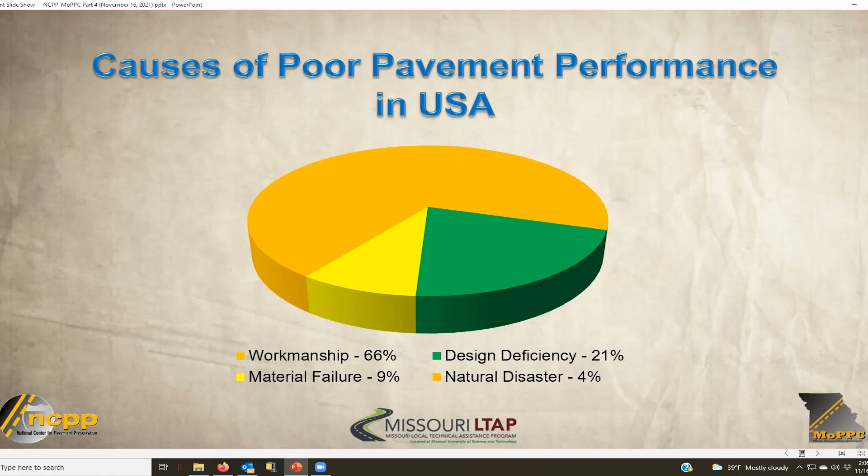But workmanship is the key. We're going to go through and show you a couple examples, because we can talk about this all day long, but if we're not getting good workmanship out on the job, we're going to have a problem. This is an example of poor chip seals - unacceptable.

You can see that probably the aggregate was dirty. Maybe they didn't sweep it properly. Maybe the emulsion began to break before they actually got the stone embedded. Maybe they didn't roll it properly, but these are all problems.

This is what a chip seal should look like. And I want you to think about this for a moment. A chip seal is made out of oil and rock. My gosh, isn't that what hot mix is made out of? And if you can't make a chip seal look like a hot mix, you're doing something wrong.

We owe it to the public to give them a road that doesn't have loose stone, that looks good, and it's going to last a long time. And if we're doing a chip seal properly, this is what we get.

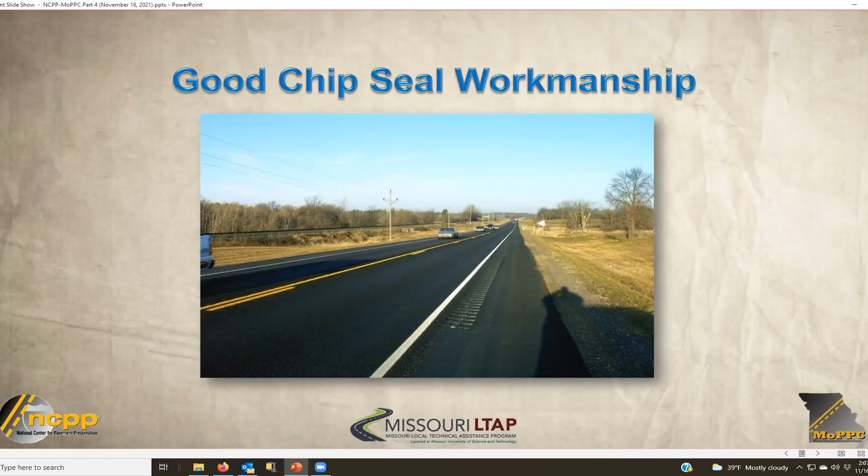Let's move into workmanship that's unacceptable with microsurfacing. You can see the chatter, or the little chatter bumps in it. You can see a joint. It's not a good microsurfacing, and this really is unacceptable.

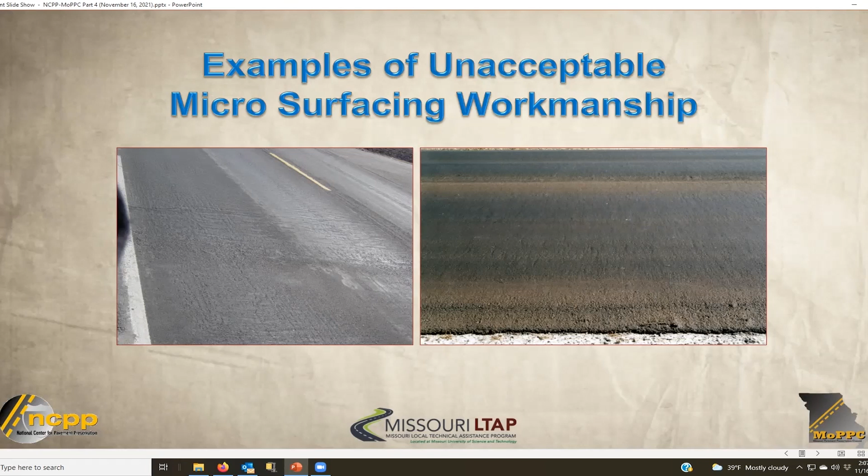Microsurfacing, we can put it down and open it up to traffic within an hour's time in most cases. And a microsurface will wear for years. So it's a very, very good product, but it's unacceptable if the workmanship isn't there.

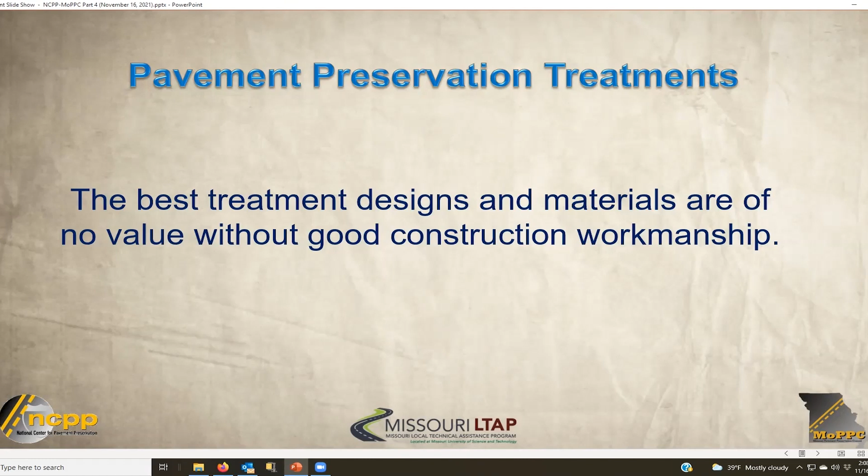The point I'm trying to make here is the best treatment designs and materials are of no value without good construction workmanship. And what's the key to construction workmanship? It's a quality assurance program.

Chris and I can talk about this for a long time, but quality assurance is not only quality control from the contractor, it's quality acceptance by you, the agency person, and then it should have some sort of independent assurance along with it to make sure the tests are done right and things are calibrated properly. So this is one of the keys.

And if we have a good quality assurance program, we're not going to have a problem. Both the agency and the contractor take responsibility for the project. So quality assurance is the key.

Now let me jump ahead into one other portion. This is talking about specifications, and this is where your input is important. We have a polling question - Christy, if you could put that up.

And the polling question is, where would you likely find a good pavement preservation treatment specification? Give us just one single choice.

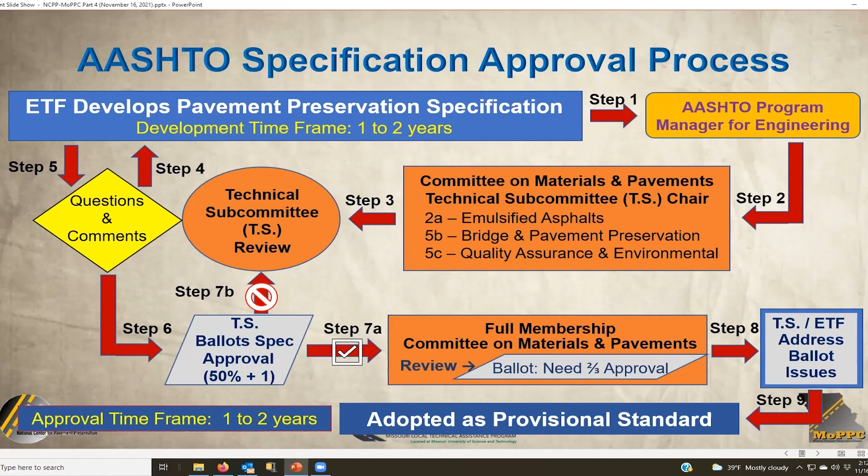And that's why I like AASHTO specs, and that's why I want to talk about them, because they are really important. They have their own referencing system.

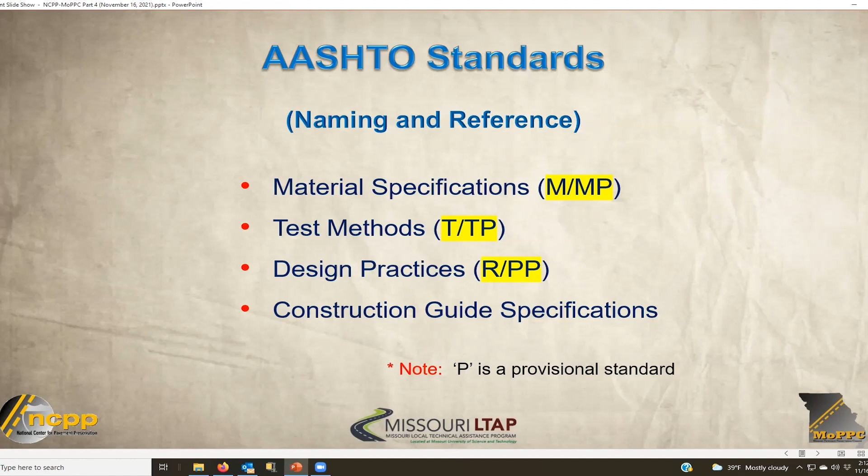If you want to get a spec from AASHTO, you'll have to pay for it - they're in the neighborhood of about $35, some a little more, some a little less. But they have various codes. The P at the end of each one means a provisional standard, and provisional standards are there for a while until they become a full standard. They become a full standard when people begin to really use them. So that's just a little bit for your information.

Now I'd like to have you write this address down, because I'm going to give you a way you can get an AASHTO spec at no cost. So http://TSP2-ETF.org. I'll give you just a second to write that down. And that's going to take you to a web page.

First thing you'll come across are all the checklists - these are just the asphalt emulsion treatment checklists. The National Center wrote these back in 2019 for Federal Highway, and Federal Highway has since published them all. If you're out on a job and you don't know exactly what to look for, these will tell you - it's a step-by-step of how you build a job, not as a contractor, but as an agency person, how you build and inspect the job. So these are good resources for you.

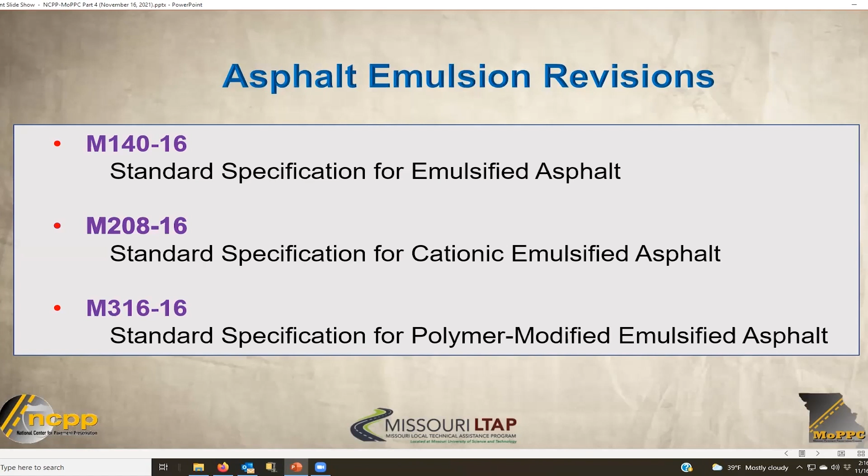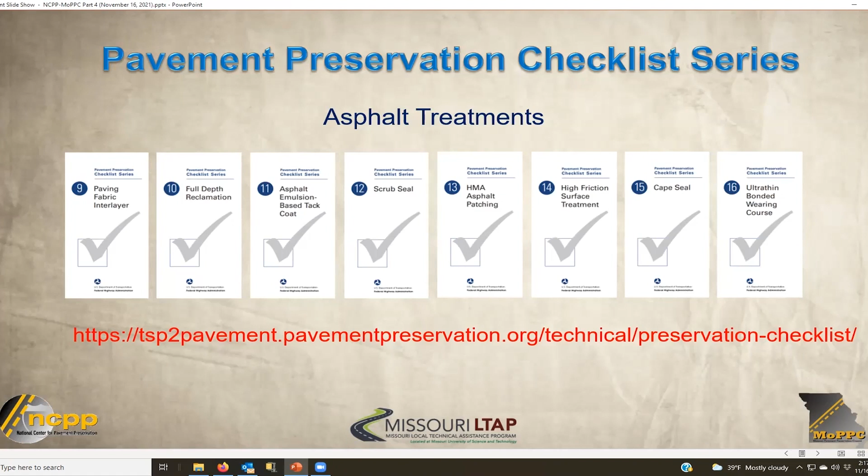If you want to get into more treatments, Federal Highway has the checklists on their website too. So it's the technical preservation checklists, and they have them for concrete as well. So that's a real quick run through.

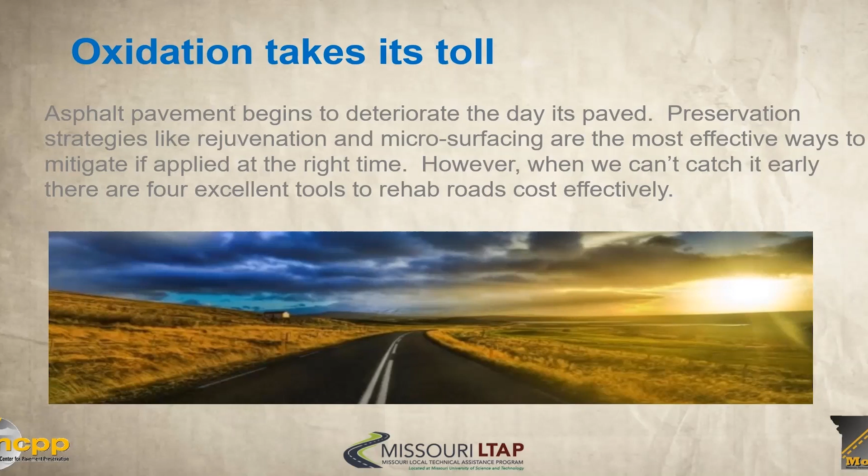However, when we can't catch it early, these next 4 tools are great to rehab roads cost effectively and in essence put us back on an equal footing when we've lost the initiative by not doing enough on the top of the curve. So without further ado, for those of you who may recall, we had the first of these costs kind of 1 through 6.

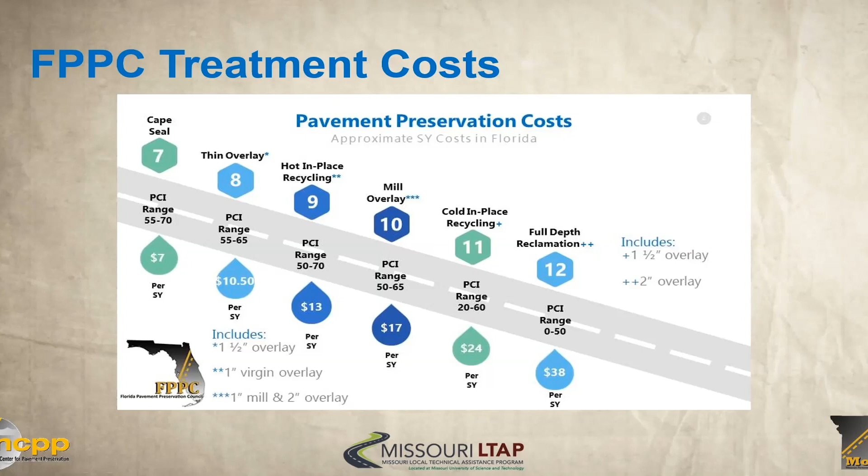Okay, so which type of process are you most familiar with? Let's start that, see what we got. All right, I'll give you a few more seconds.

I'm rooting for somebody to hit cold in place recycling. Poor cold folks are in the cold. Okay, I'm going to shut it off now.

We'll keep on moving. Okay, so as we can see, we've got pretty equal full depth reclamation, which is actually, again, not really a preservation technique, but it wins with 41%. And then we got tied for 29% at warm mix and hot in place recycling. So cold in place, everyone on this call is going to get more familiar with cold in place. So pretty exciting. All right, let's get back to it.

Starting with asphalt overlays, there's a couple different strategies. We're going to cover real quick some thin overlays, kind of an intro, and then talk about bonded wearing course briefly and warm mix asphalt.

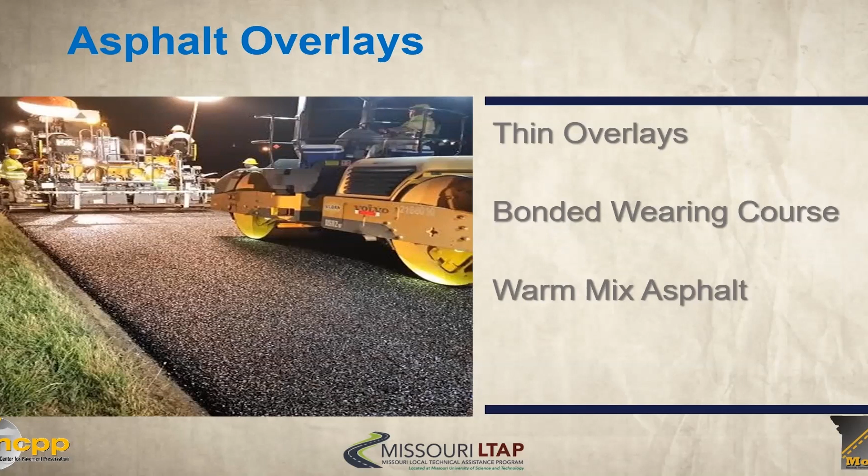Thin overlays are really that traditional overlay process. It can be with or without milling, and the thicknesses range, as far as what we'd consider strictly preservation style overlay, anywhere from that 4.75 millimeter, sometimes more of the Superpave 9.5 or 12.5. But these are really designed for use on pavements that are in good condition or structurally sound base-wise.

There's some different types - obviously conventional dense graded, and then you've got open graded friction course and stone matrix asphalt, SMAs. In addition, we have something called the ultra thin bonded wearing course.

If you're familiar with the EDC - I think it's 6, they all run together - if you're familiar with that, this is actually on the current Every Day Counts initiative, and it is listed as one of those techniques.

This is an old picture from back in the early 2000s on a project I was on, and it used to be called NovaChip back in the day. In this picture it is.

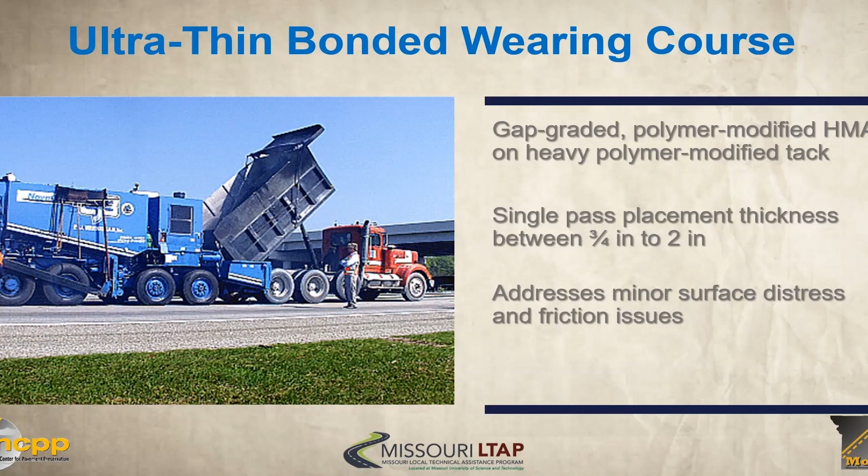It really uses a gap graded polymer modified HMA on this polymer modified tack coat. It's a single pass treatment, and the thickness really ranges from 3/4 inch to 2 inches. It's really intended to address some of the surface distress and friction issues, in addition to some light raveling, those types of things.

This is what happens if you step in it - it's highly polymer modified, the tack coat is. Definitely don't want to stick to the road.

This is a picture I took back in 2001, and you can see this material kind of wicking over a concrete pavement. I would kind of equate it to the rubber band effect - it's an SB, styrene butadiene block copolymer.

It sprays very easily, cures quickly because the hot asphalt is placed over the top of the emulsion, and obviously has a lot of superior bonding qualities to that as well. And then you can read the rest.

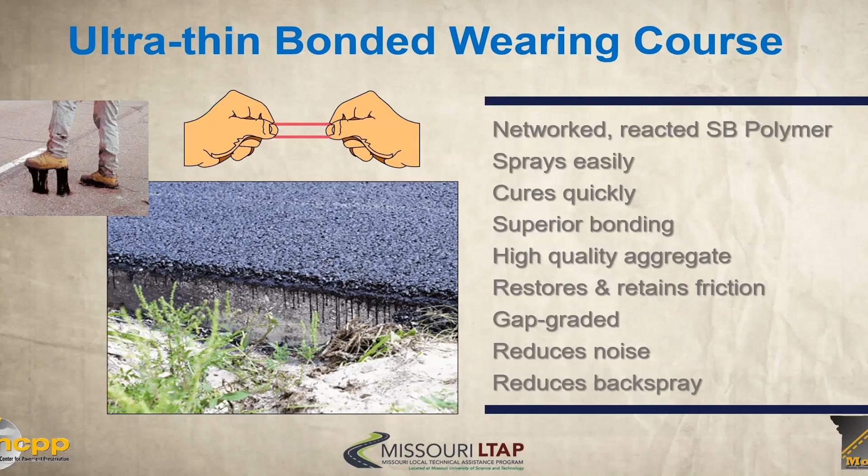We've got reductions in noise and back spray because it is gap graded. It's great on friction. And this is what it looks like when you're looking down at the spray bar in the back of the paver.

So here's where the asphalt is being placed onto the mat, and then you have the screed back here. But right in front of that is a spray bar, which is variable width, and it's spray applying this polymer modified tack coat.

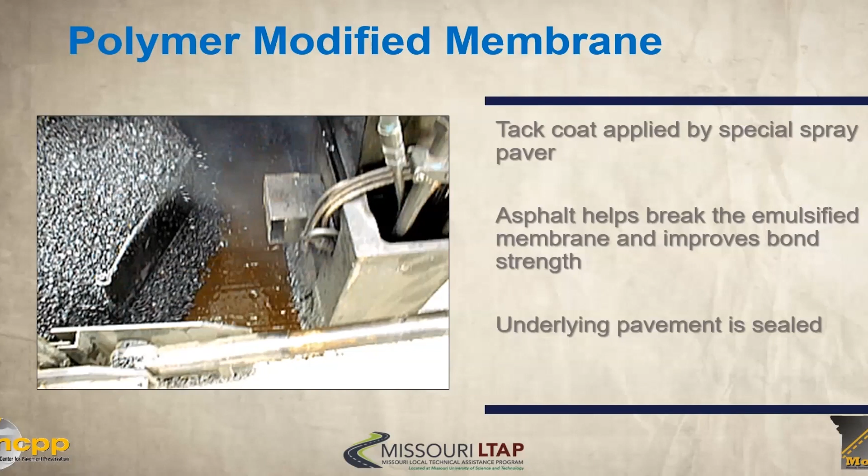So in essence, that's where the preservation comes in - it's sealing the existing pavement. This would be akin almost to a rubber membrane interlayer, for instance. And this hot asphalt helps break the emulsion very quickly, and it improves the bond strength.

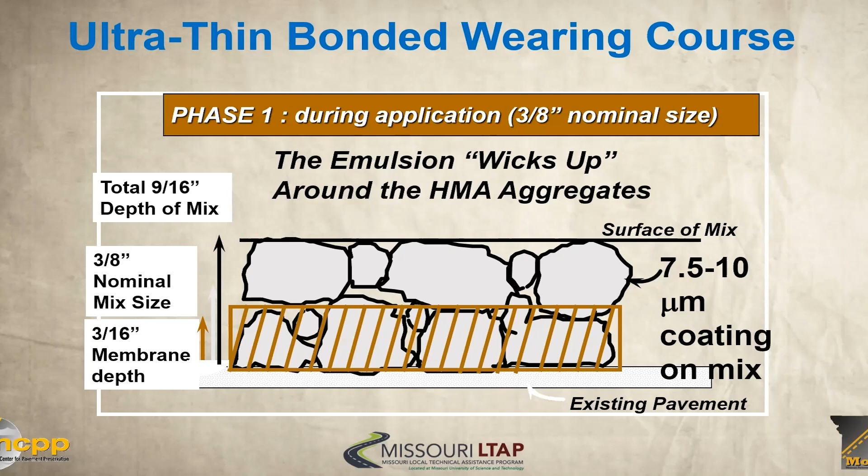Because you have greater micron coating on the mix, on the aggregate, it's going to extend the life of the asphalt overlay. And here you have it again - you can see now, it should be black, but this little section here is now cured and adhering to the existing pavement.

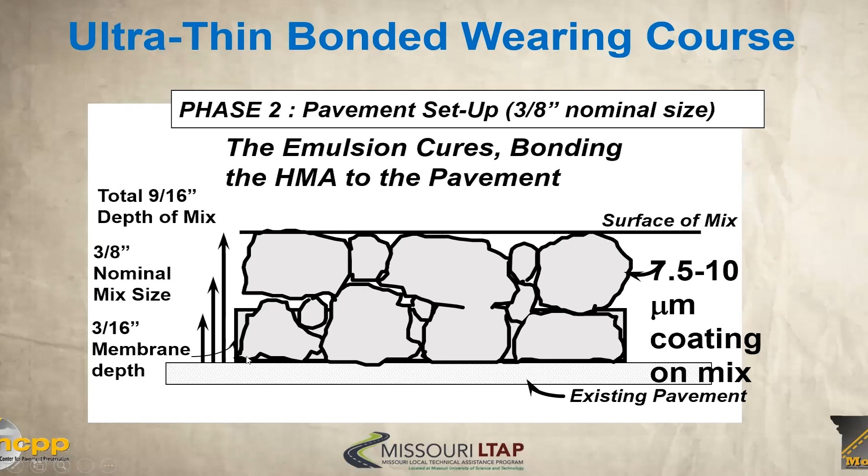It's very quick, and for something that's normally not done - meaning we don't usually do very thin overlays on top of concrete because of the fear of delamination - this is very effective. We completed the project, or the test section, in less than a couple hours.

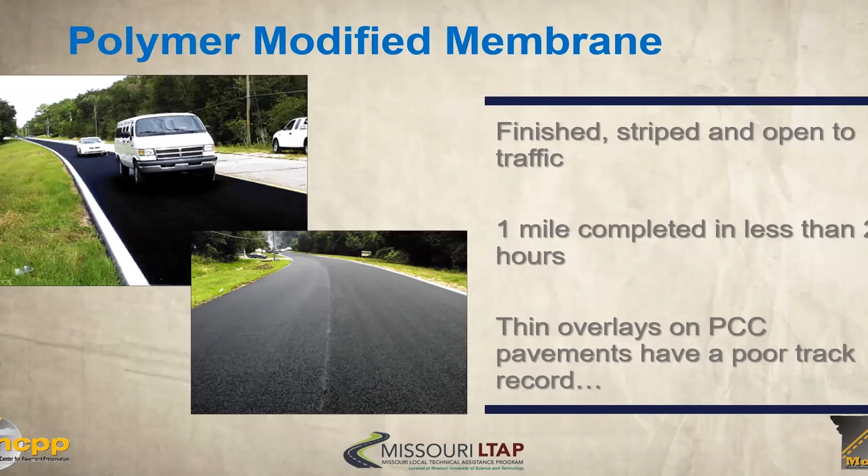Typically you would have a lot of cracking come back through this at less than 1 inch. But you can see here through the ages where I've been able to follow this same joint, just how effective it's been.

I actually was out there - I didn't get a picture of it, but I was out there in 2020, and it still looks very good.

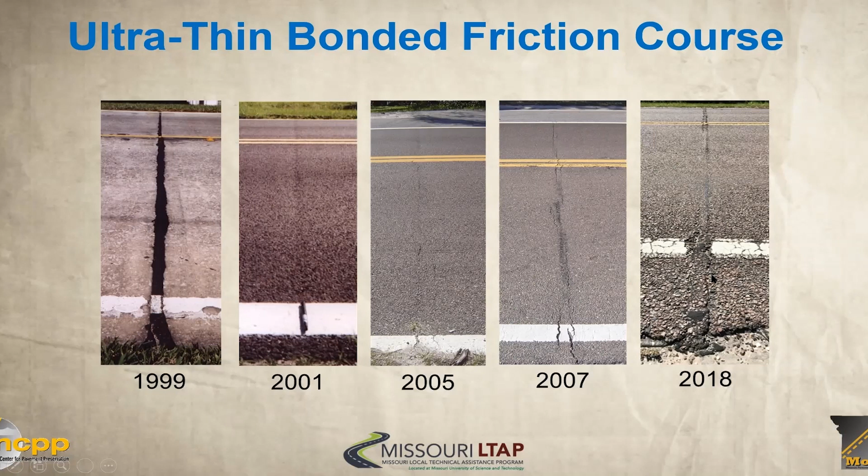It looks about like this. So we're going on over 23 years now.

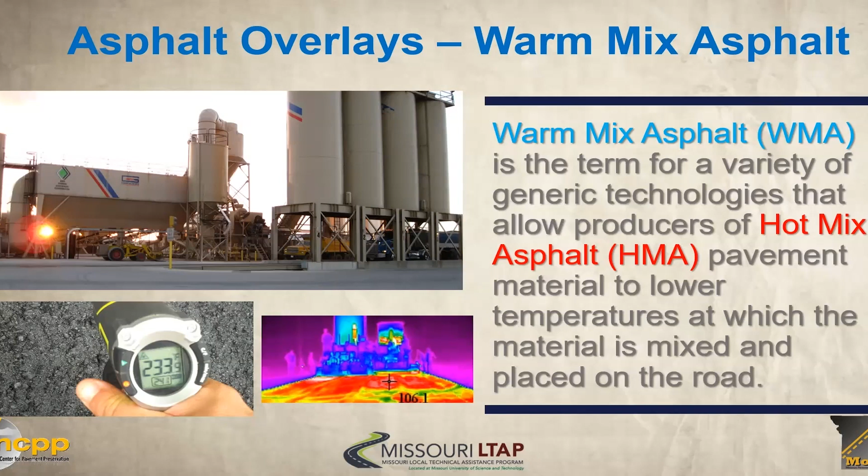Moving over to warm mix asphalt, that's really the term, and you probably are hearing more and more of this, especially as we get into what you're seeing with the emphasis on green technologies. Warm mix definitely qualifies, and this is a generic technology that allows asphalt producers to produce the mix at lower temperatures, and there's some benefits to that. I won't spend a ton of time.

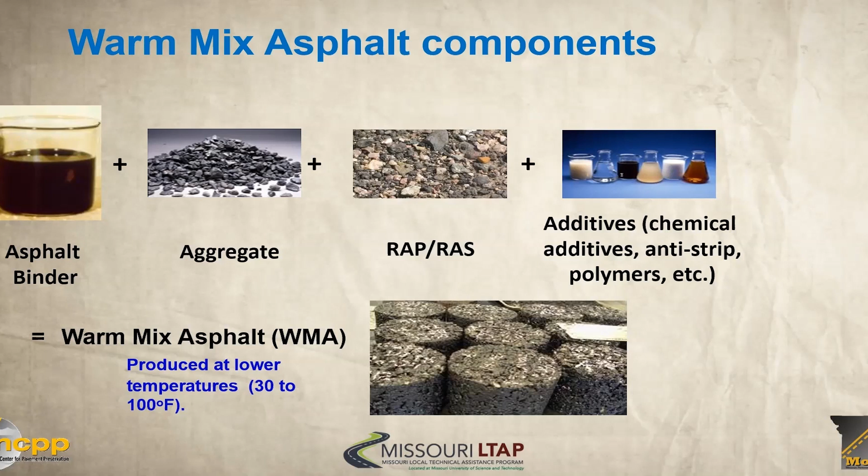There's multiple different types of additives or technologies, and they each have some different requirements. Foamed asphalt requires special equipment at the plant. But if you look at the components, you have the asphalt binder and aggregate, and then you could have RAP or RAS, and then the additives, if it's a chemical additive or anti-strip, polymers, those types of things. You add all those things together and you get warm mix asphalt, which is typically produced at much lower temperatures, meaning less greenhouse gas emissions, less fuel burned at the asphalt plant.

So if you look at the advantages, this is a great picture, and I've seen this myself in person, how much less emissions and smoke and issues resulting from warm mix versus hot mix. You can just see that right there at the project.

And because of that, we're able to replace some of the things that go into standard hot mix, like lime or liquid anti-strip, because some of this chemistry is actually also a liquid anti-strip.

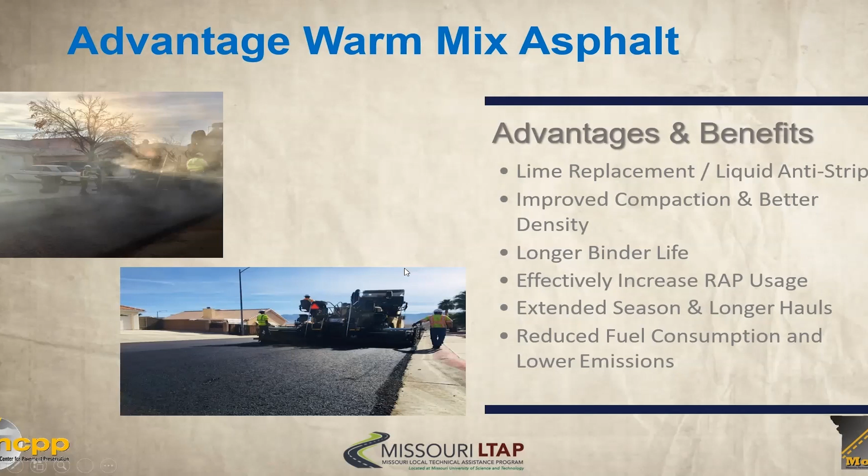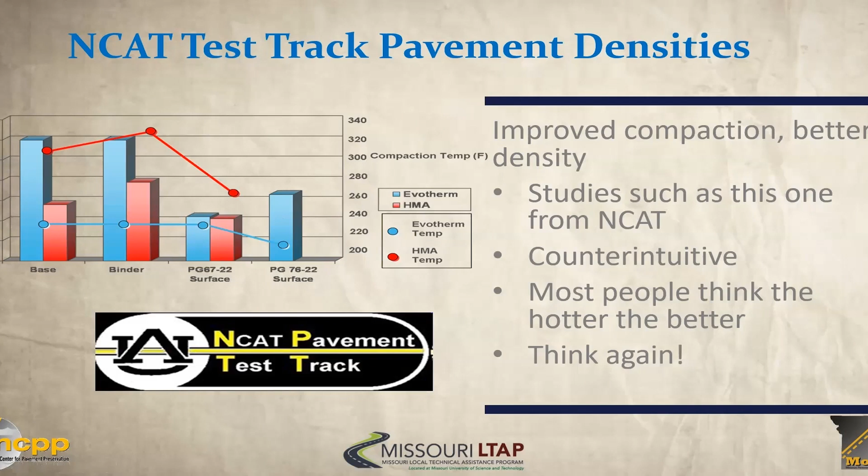Same thing across here. And you can see for PG 76-22, we didn't even use a hot mix technology in this instance, it just went straight to warm mix. So it's counterintuitive - most people think the hotter the better, but we need to change that mindset and really look elsewhere.

So just as we talked about in Module 3, the maltenes or the light ends - those are the three components that make up the maltenes versus the asphaltenes in the asphalt binder. This is also helping us with warm mix because less of these maltene fractions oxidize, volatilize, and leave the asphalt under the hotter or cooler conditions.

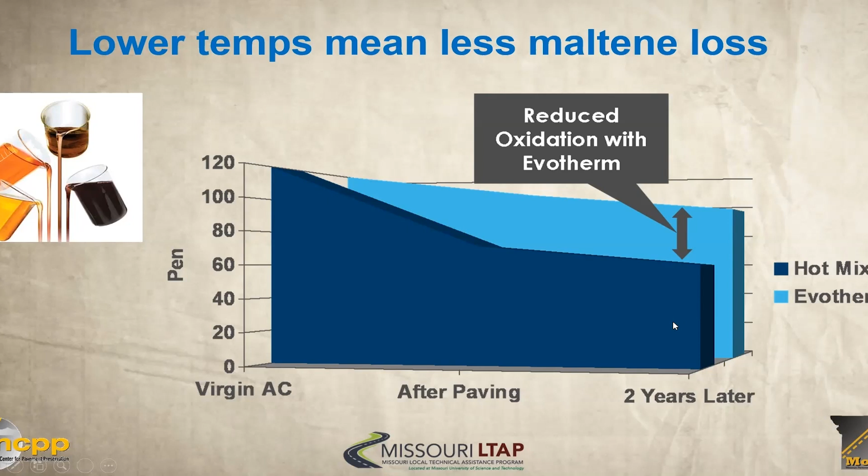So in this instance, again with NCAT, you saw this reduced oxidation with the warm mix technology here. And that equates to a longer binder life after 2 years, so increased RAP usage obviously can save money.

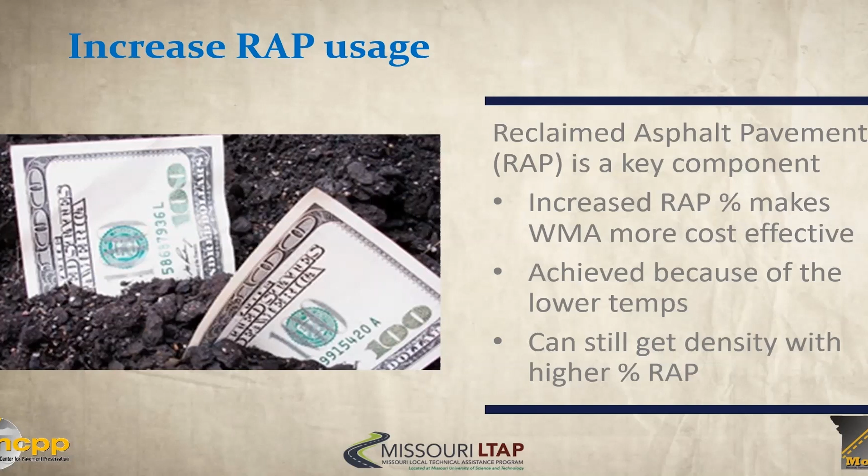We won't spend a ton of time on this, but increased RAP obviously makes the warm mix more cost effective. And we can achieve these savings and include more RAP because of the lower temperatures and still being able to get good quality density of this mix with higher RAP percentages.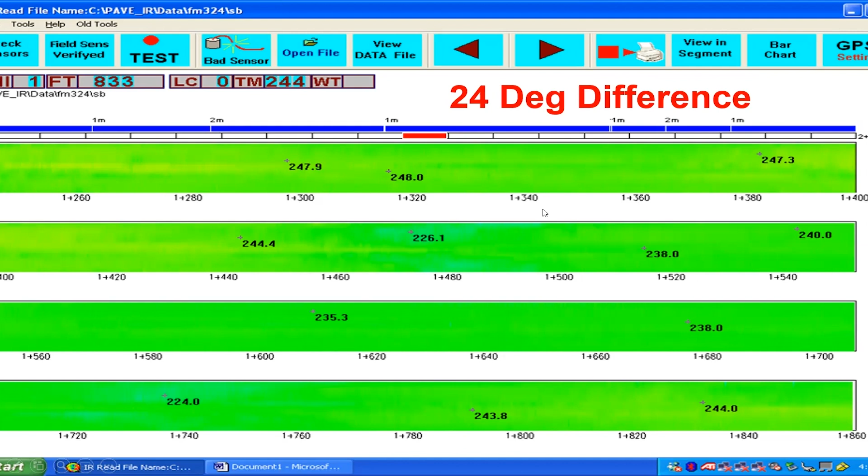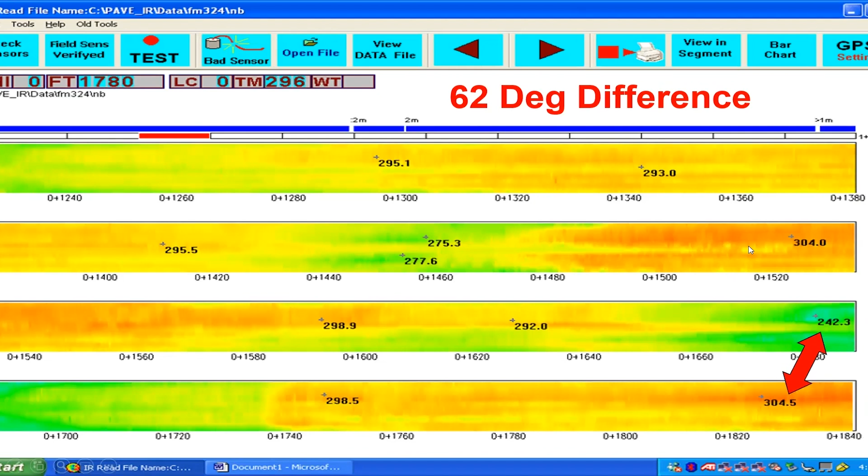Whereas with warm mix, because of the thermodynamics of the material and the fact that the cooler it is, the less rapidly it continues to cool, we have a much lower delta between the beginning of the load and the end of the load. And there's a definite advantage to that. So typically you can see load segregation, thermal segregation, meaning this part of the pavement wears out at a different rate than this part of the pavement, and that's decreased.

The other thing is that the hotter you have the aggregate, the more absorptive it can become. So asphalt contractors have figured this out, and they can actually reduce by maybe a few tenths of a percentage the amount of asphalt binder required to achieve the same results. So you can see in this core, we have hot mix and then warm mix, which is really fascinating.

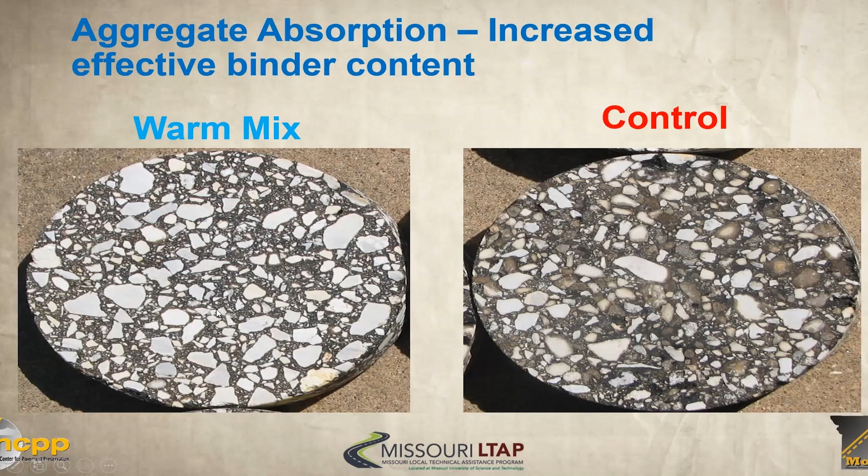Obviously much greener - if you looked at a tunnel with hot mix, it'd be full of smoke. So stack emissions test - I've talked to asphalt contractors here in Florida where when they're running a stack test for pollutants, they run warm mix. So they make sure they run it because they get much better results.

So let's do poll question number 3 here, and then we'll hop into the next segment. Which advantage of warm mix asphalt is most valuable to you? For those of you who are using it or have used it, let's go ahead and see what you chose as the highest value.

I'm interested since this is Missouri, so we'll see what everybody comes up with. All right, we'll do about 10 more seconds. All right, let me wrap this up and share the results.

So as you can see, it's kind of a mixed bag. We have longer binder life, which I'm excited to see. And then we have improved compaction, better density. In some ways that also can be shared with that extended season, longer hauls, because you're getting these better densities in longer hauls, and actually giving yourself the ability to go a little bit later into the season, which I imagine everybody's trying to do. And then finally, lower emissions.

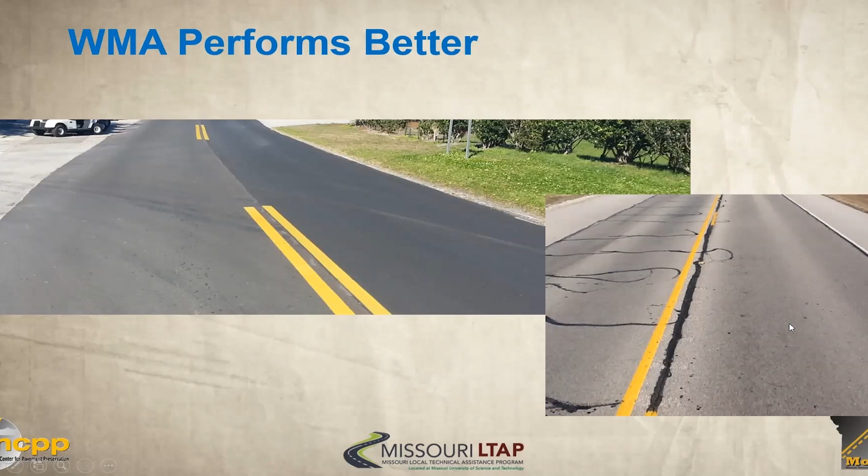So if you look at this side, this is the warm mix side versus the hot mix side.

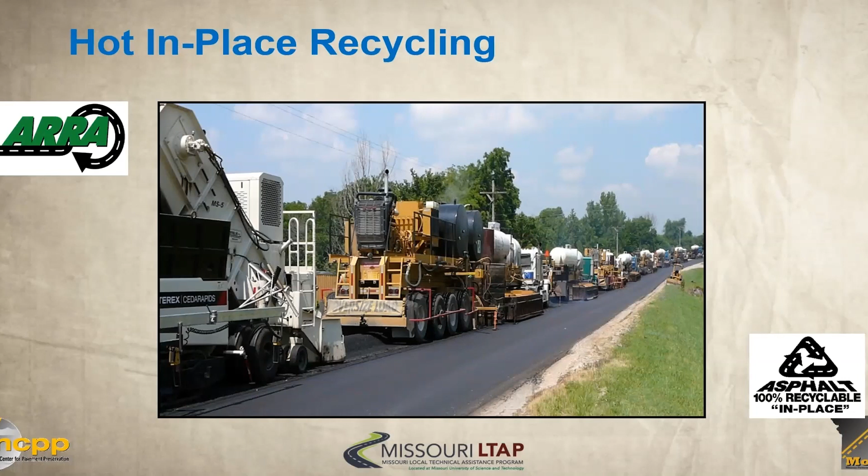In the end, okay, we'll dive right into hot in place recycling, try to keep this train moving, pun intended. This is a serious train right here. These are preheaters, you can see just how many they have stretched along here. And this is a process that is really fun to see if you haven't seen it take place.

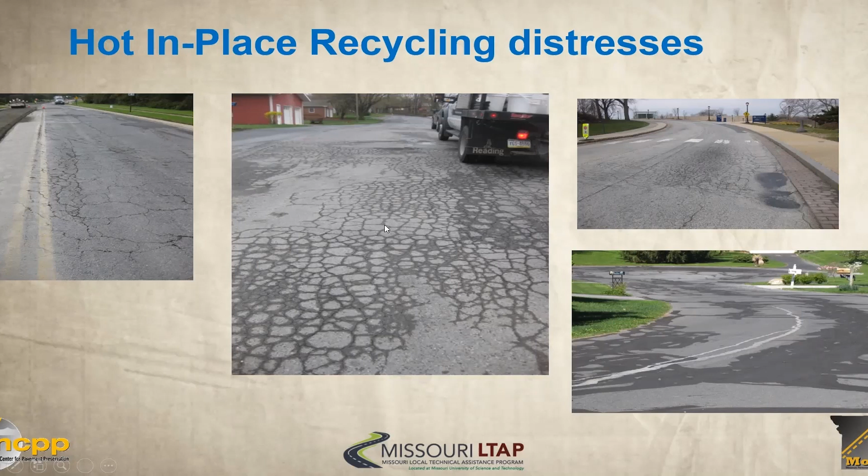So what kinds of distresses can hot in place address? Well, here's a few slides, and it's important to make a distinction of what's causing these cracks. Coring is recommended in any of these in-place recycling techniques. We want to make sure this isn't base related, that this is more of a surface asphalt situation.

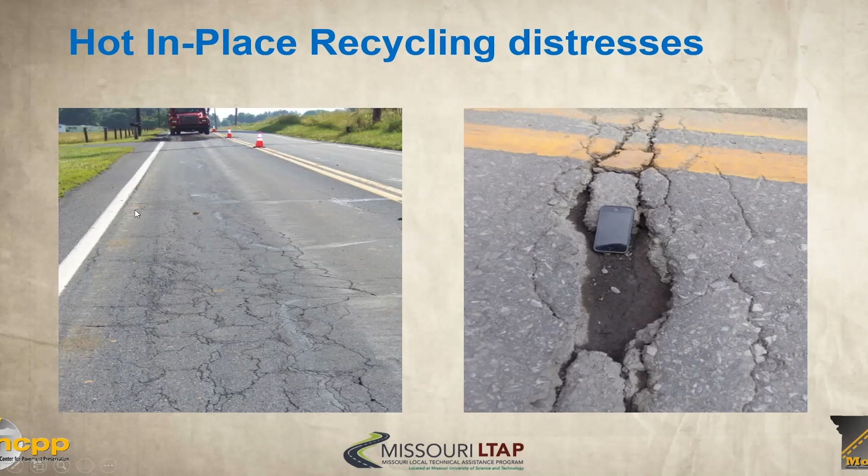So let's do another poll question, number 4, we're keeping you guys on your toes. All right, what type of pavement distresses can hot in place recycling address? This is a little pre-screening to see how familiar you are with the types of distresses that can be addressed. We'll see there might be something to trip you up a little bit here, and we'll see what you come up with.

When in doubt, everybody always goes for all of the above. Let's see what happens here. Give you a few more seconds. Okay, I'm going to share the results.

So it looks like most folks think all of the above. And while that might be appealing, there's one thing we have to watch out for. There should be a little asterisk here, fatigue cracking. Some of the pictures that I showed kind of looked like a fatigue cracking issue. We have to make sure when we're using hot in place that the base is not the cause of those alligator crack patterns in the pavement.

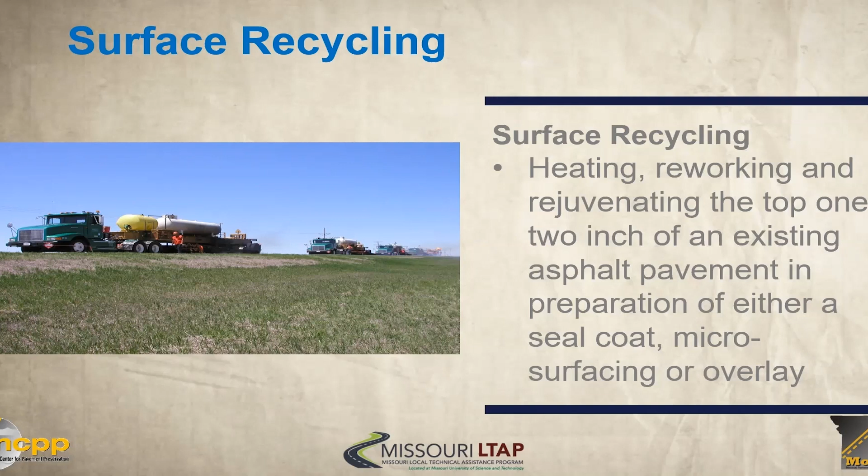And it also depends, with that poll question, on which type of hot in place recycling technique or strategy you're using. With surface recycling, you can see here, we're really focusing on heating, reworking, and rejuvenating that top 1 to 2 inches of an existing pavement. We might be doing that in preparation of something else, or it could be that we're leaving it as such as the riding surface, depending on traffic levels.

So for that process, just a brief introduction: you want to heat the pavement to about 275 degrees, and then basically you're going to try to scarify the heated material to a depth of about 1 inch. Then that scarified material is compacted, and the recycled lift is overlaid. So if you look at it here, we're compacting this recycled material for the surface recycling.

Now, one thing to note is this is typically, because we're penetrating down about 1 inch, this is typically why we put some sort of other surface treatment on top, because in essence this is recycled material, and it might be good if you look at the longevity of the pavement to really look at another overlay or maybe a micro slurry chip seal over the top.

And this would be an area that we use for more of a rural condition. You can see from these two slides, very rural environment here. Could be in my home state of Kansas for that matter.

So talking about remixing, this is really getting to be—these next two more frequently used than just surface recycling around the country. This is where we're heating, reworking, and rejuvenating the top one to two inches and adding virgin aggregate, mixing that virgin mix in with the newly recycled material in a pug mill, and then laying that, either as a binder or a surface course. So this is a common type of approach and one that we see.

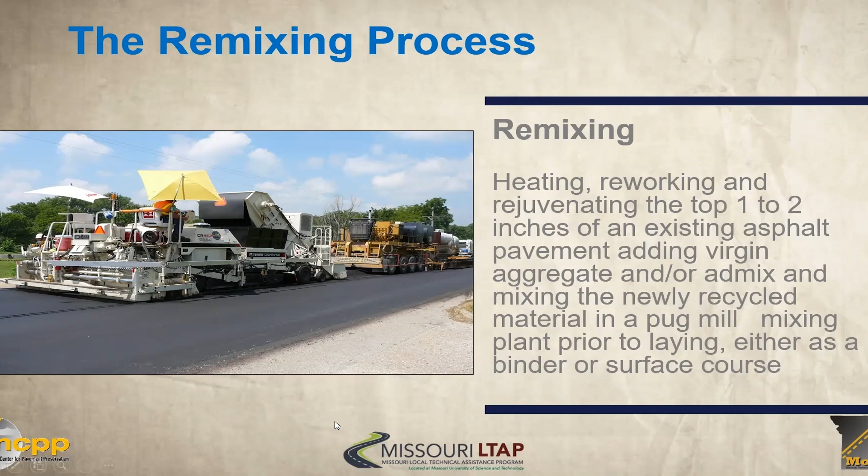Now, it does share kind of similarities to the next process that we have. I'm going to show a little film from Sedgwick County over in Kansas, my home county, if you will. I was able to find this, so let me cue this up and see if this works.

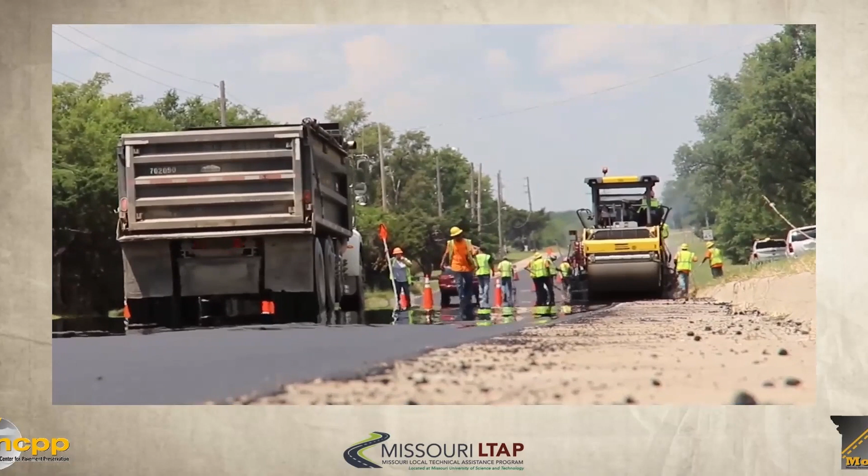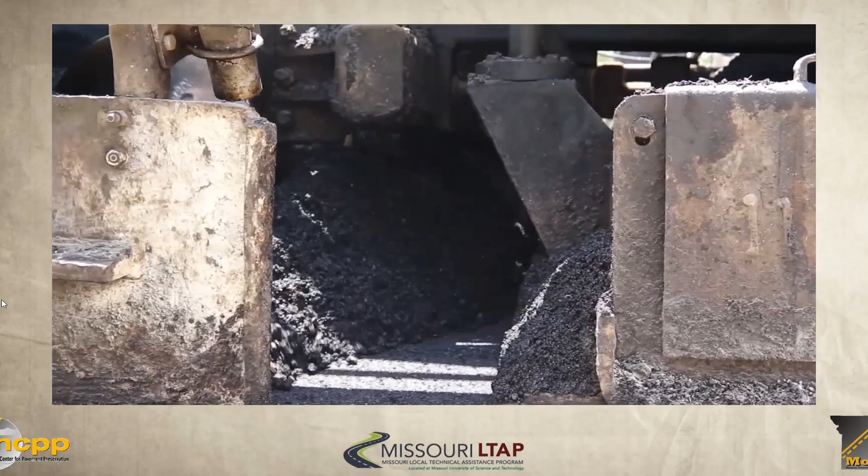There's no sound, Chris. Oh, there's no sound? Okay, this happens sometimes. That's okay. So I don't know why I can hear it.

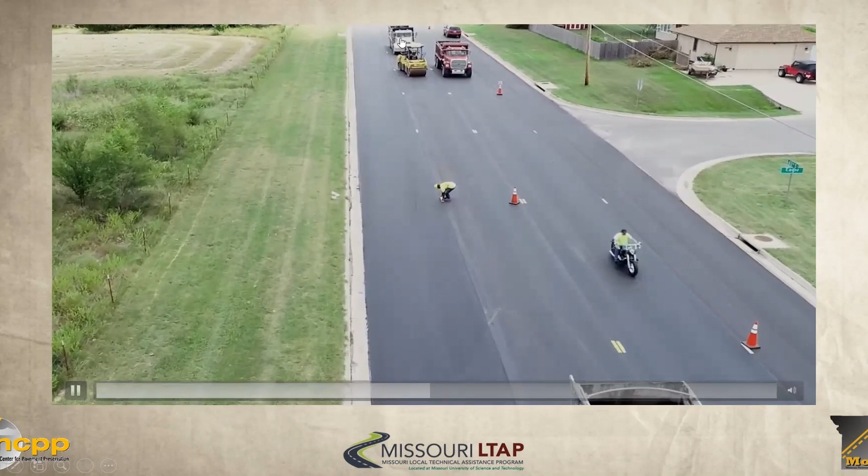Thank you, Larry. And so what you can see here is that they're basically using a process, a hot in place recycling that's going to remove the distressed, old oxidized pavement, and then hot in place recycle that. This specific strategy is repaving.

Continuous process with the self-contained train. This is what's happening: you're heating the surface, you've got heated pavement milled, and then we're able to inject emulsion per the mix design, mix and use a windrow, and place the recycled material by the paver and then compact that.

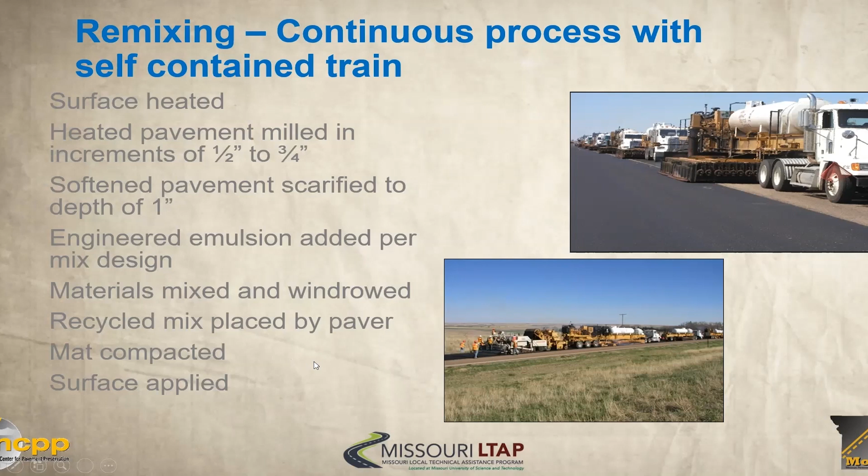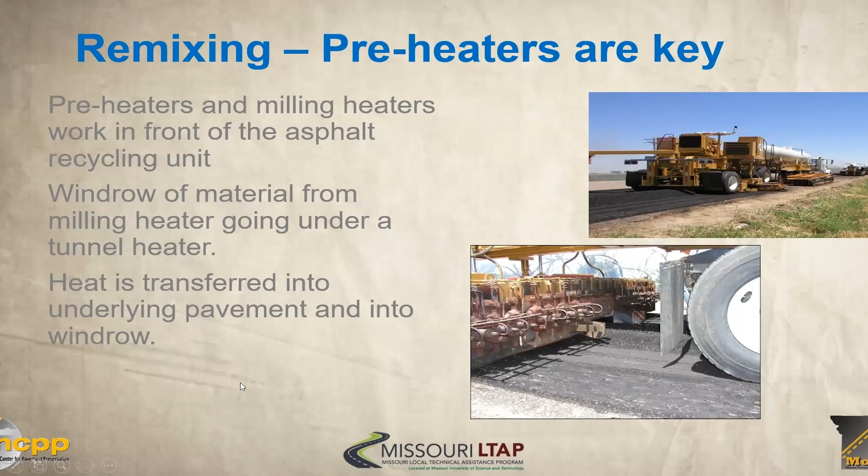So as with any of these, the preheaters are key. That's why you saw that slide where it showed just a handful of preheaters in front. Here's the windrow you can see. You windrow this material from under the tunnel heater, and the heat is transferred into the underlying pavement and into the windrow. This is a very effective way to do it.

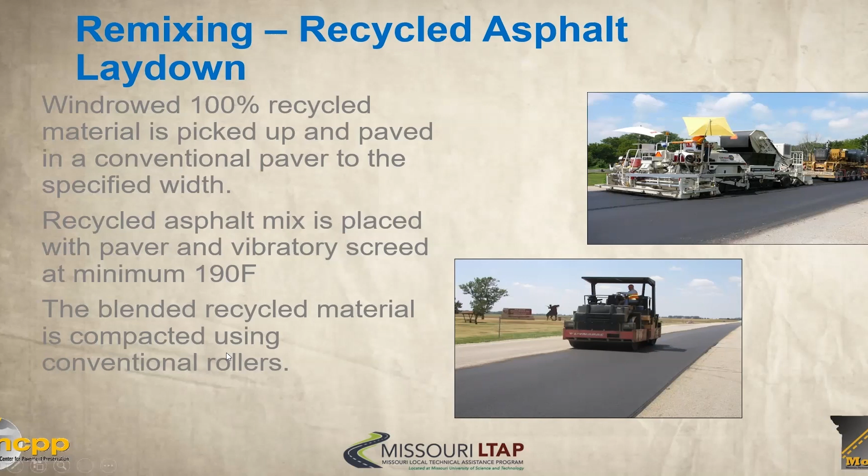And the nice thing is that windrowed material, one hundred percent of it is recycled material, and it's picked up and paved with that conventional paver. Then the recycled asphalt is placed with the paver, and you've got now a blended recycled material that's compacted with conventional rollers.

So this final strategy is called repaving, and repaving is different from remixing in that we're heating, reworking, and rejuvenating the top one inch of an existing pavement, and simultaneously, as you can see from this, we have two screeds simultaneously placing the virgin mix over the recycled mix. So here is the recycled material, here is the virgin material. And so that's the distinction.

And it has some distinct differences as well. In this instance, this preheater is using hot air instead of traditional burners, and the train is scarifying, adding a rejuvenating agent, and then laying the recycled material. And like you saw, the train actually has two screeds. So the final lift is always new—in this repaving process, it's always new asphalt.

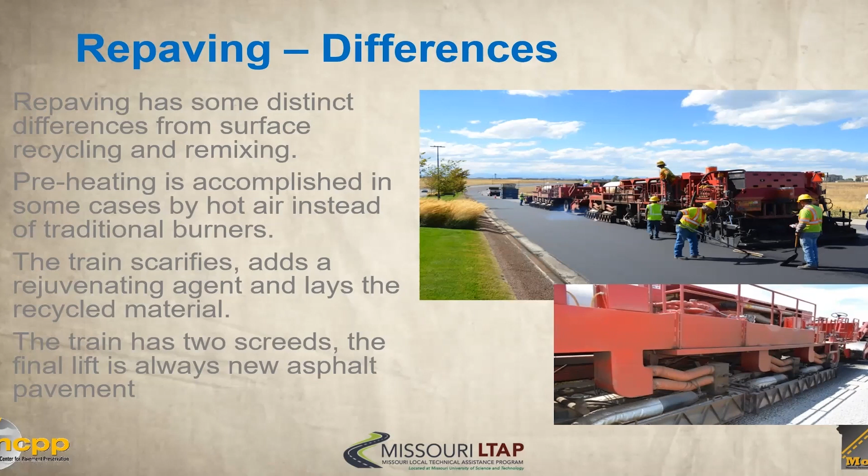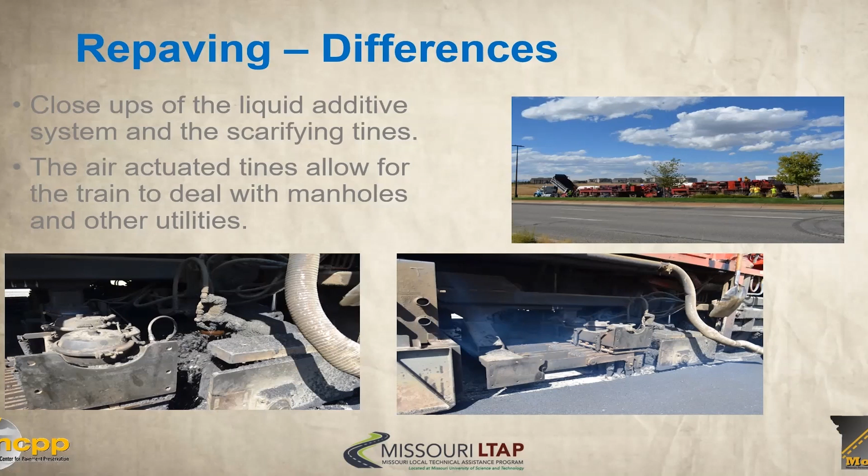So as far as close-ups of the liquid additive system, you can see that right here. The rejuvenating agent is added. You can see the scarifier, and right over here, there are the tines for the scarifiers. They're air actuated, so they'll pop up if it comes in contact with a manhole or other utility.

So this is interesting because we're going to kind of combine the first part with the second part, where warm mix technology has actually been used in the final lift through a recycling train. And so that's pretty interesting.

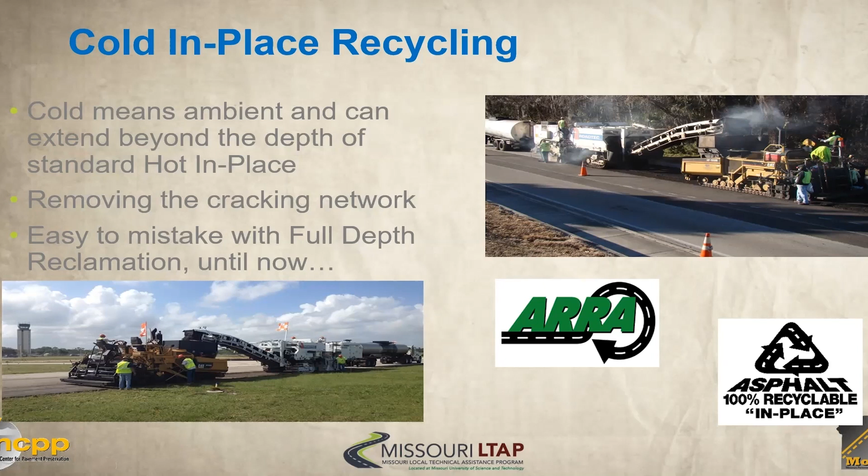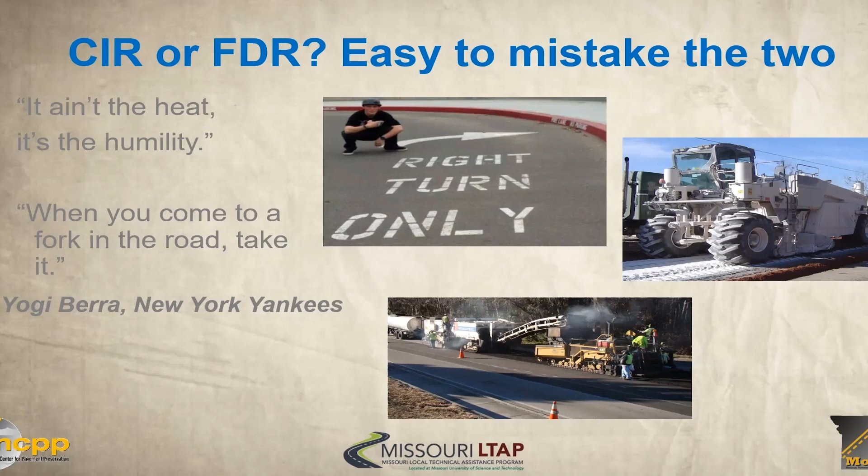So, CIR or FDR, easy to mistake the two. A couple yogi quotes that I love - but if you look at it, there are very serious similarities, and this has gotten harder over the years to determine the differences. So we'll get into a little bit of that, but I want you to keep in mind that I've seen a lot of people are familiar with FDR in Missouri, but they're not as familiar with cold in place. We're going to get into that.

Here is cold in place recycling, a definition. I spent a lot of my career in the cold in place arena, and this is kind of the difficulty. With cold in place, we're recycling the deteriorated asphalt pavement that has really reached the end of its life cycle. This is something we typically would mill up and haul back to the asphalt plant and reuse as RAP in new mix. But instead, we're actually going to recycle it in place.

The typical depths are anywhere from 3 to 6 inches. I would say 5 inches is the most common. The milling machine is going to cut and size that old asphalt. The material's then mixed with asphalt emulsion and then paver laid and compacted to the depth that is required.

This is a great shot of the train. You have the emulsion tanker, you have the recycling train here - this is a single unit train - and then you have the standard asphalt paver.

What it is very effective at is being a rehab strategy which can save a tremendous amount of money, up to 50% of traditional reconstruction costs, and it also is very fast compared to remove and replace.

In this instance, this is near St. Augustine. Funny enough, the story behind this road - we didn't know this at first - but there was an old brick road down the middle of this roadway that had just been overlaid and then widened. We discovered it when we were cutting through this road with the mill. We got into those bricks, caused a ruckus, as they say.

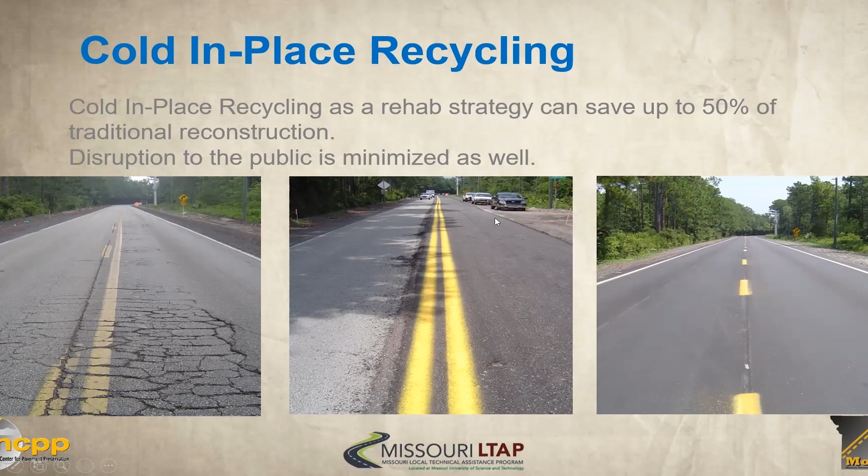In this instance, this client actually widened the pavement by using the excess asphalt here, and then pulling and laying the width of the pavement all the way out full width. So there was no joint here where you would have a traditional joint for widening.

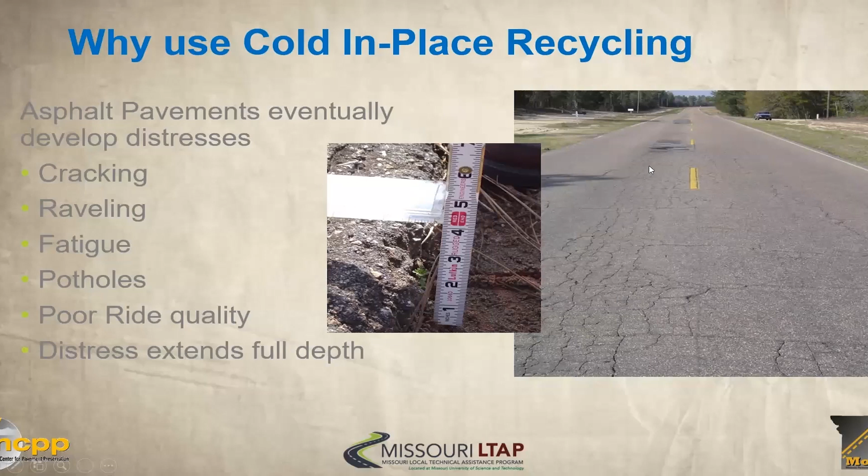As far as what kinds of distresses we can deal with in cold in place recycling, you can see the whole gamut. The distresses often extend full depth, so there's a lot of capabilities with this process. The deeper we go, however, the more expensive it is.

So let's talk about poll question number 6 real fast. What is the most common additive used in - this is actually, I made quick mention of it, but let's see if everybody caught that - what is the most common additive used in cold in place recycling?

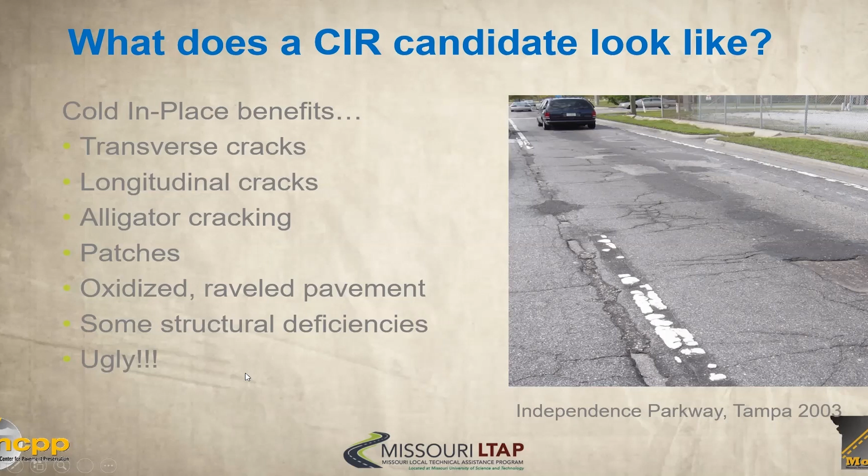With cold in place recycling, we need to know the extent of the distresses—what depth they're occurring at, and what the condition of the base is, because we're just recycling the asphaltic material on top of the base. So we're really worrying about how deep those cracks penetrate and what's underneath causing them.

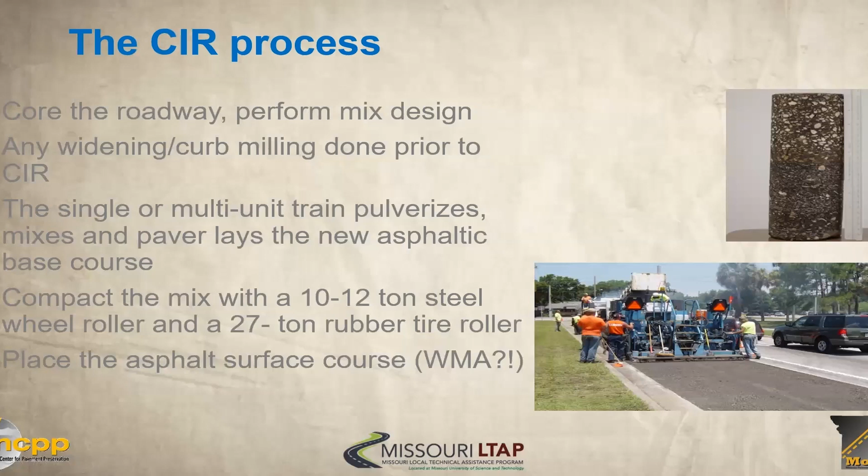You can use single or multi-unit trains, which pulverize, mix, and then lay the asphaltic base course. Then the process goes on to compact that mix, using a steel wheel and a rubber tire roller. That rubber tire roller is quite heavy—look at that 27-ton rubber tire roller—because oftentimes we're compacting thicker lifts. Warm mix asphalt could also be used, put on the surface.

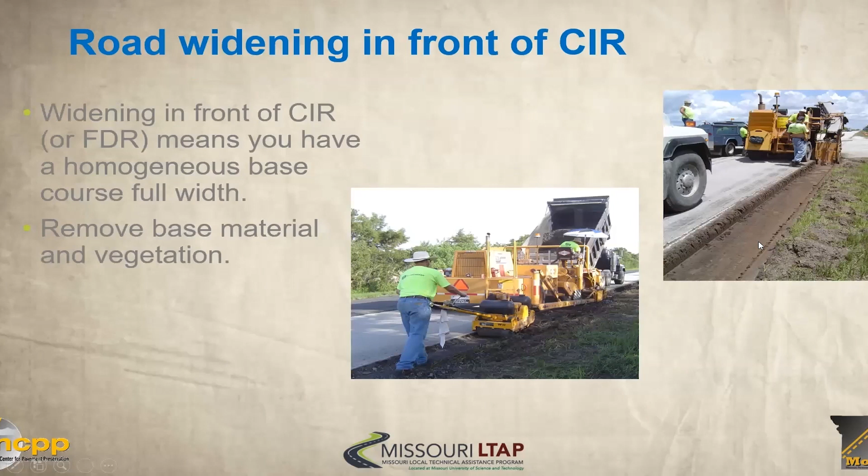So we will keep on trucking. Road widening can take place in front of the CIR—either if you have material you're incorporating, or you can actually remove vegetation and then compact the remaining sub base, putting the asphaltic base right over this in more rural instances, then putting an asphalt overlay over the top of that.

Compaction is key. We need a big pneumatic tire roller because we're compacting thicker lifts, along with a preceding and following steel wheel. Without heat, the weight of the rollers and the rolling pattern is very critical. Some contractors even utilize high density pavers that are getting compaction behind the actual screed, which is pretty interesting as well.

It's always capped with the surface course. After the base material cures, we leave this base material open while the moisture evaporates out of the mix.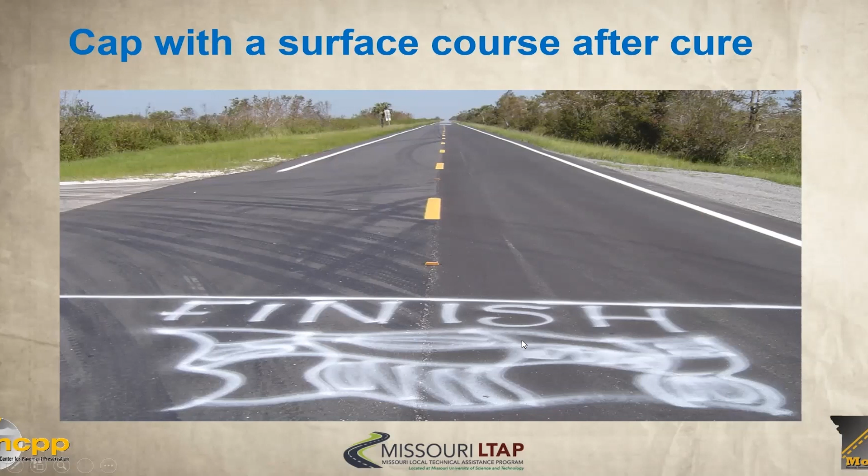And then we cap it. And when you do a really good job, you get what you have on one of my favorite cold-in-place projects, located not far from my current location. They went ahead and painted a drag strip out—this is like a 10-mile stretch and it's perfect. So as soon as we saw this finish line painted, we alerted local authorities and let them know they might be able to catch Vin Diesel out there at some point.

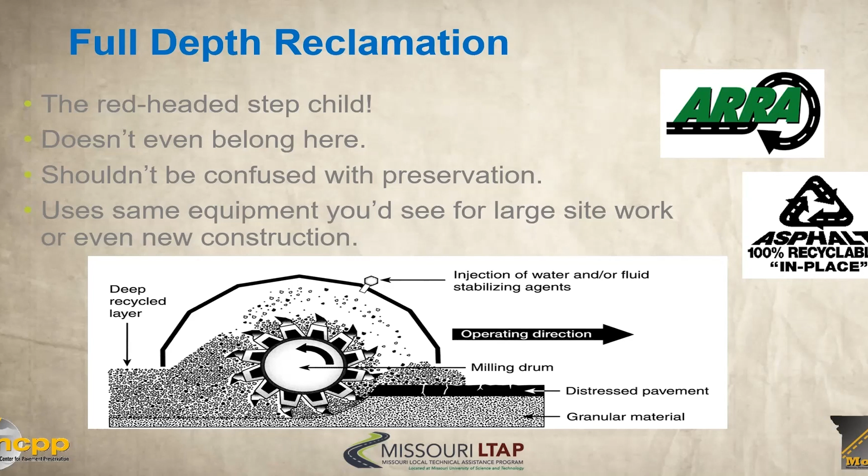So FDR is considered the red-headed stepchild. It doesn't even belong here—should not be confused with preservation, but it does use some of the same equipment. I wanted to include this so I could educate folks on why this is not included in preservation and why it is confused with cold in place.

So what is the definition? We need to know: it is a rehab technique in which the full flexible pavement or asphalt section and a predetermined portion of the underlying base are uniformly crushed and blended together, resulting in a stabilized base course. That stabilization is usually obtained by additives—we talked about some of those additives in cold in place, like fly ash, lime, cement, or typically emulsion. Those are the differences from CIR. It's used in different instances or distressed areas than CIR, and one of the primary other differences in equipment is that oftentimes the cutting head operates in the upcut direction versus the downcut.

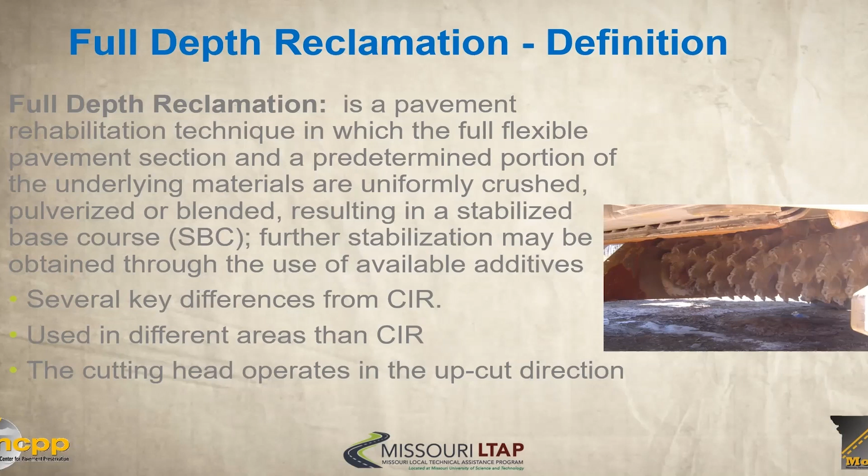So let's go to poll question number 8, if we would. All right, what is the biggest difference in CIR and FDR equipment? Some of these we made hard and some of them we made easier. So let's see what you think.

I'm so happy no one's picking the color. That's good news.

Okay, let's end the poll. Yes, the milling head direction is one of the biggest differences in CIR and FDR equipment. That said, we've even seen less and less of that be an issue, because I've seen FDR using cold in place recycling equipment, and that's in essence what's been going on. You have got to really have a better understanding of what you're trying to accomplish when you're using CIR versus FDR, and what depth you're penetrating. So that's what we have to say about that.

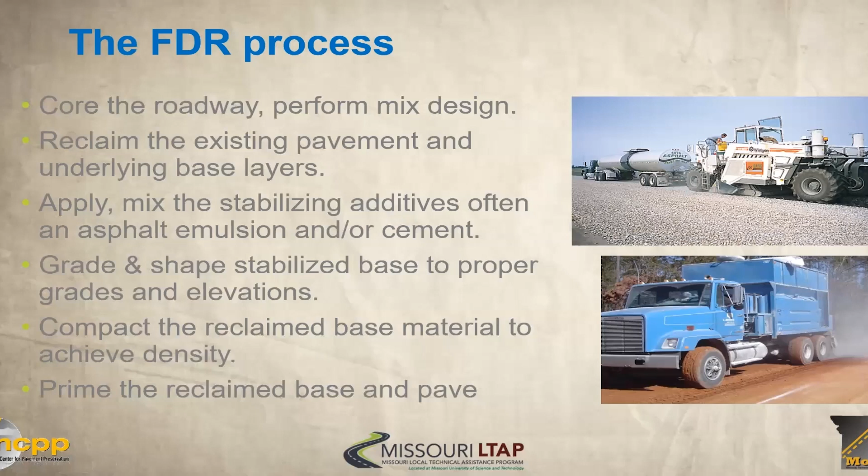So core equipment in action, you can see reclaimers, graders, additive trucks. We could have dry additive, could have rollers. We definitely have rollers, water trucks. Here is an instance where we've got the train on one lane and the steel wheel on the other lane. This is actually a runway project. We're doing some fine grading and compacting.

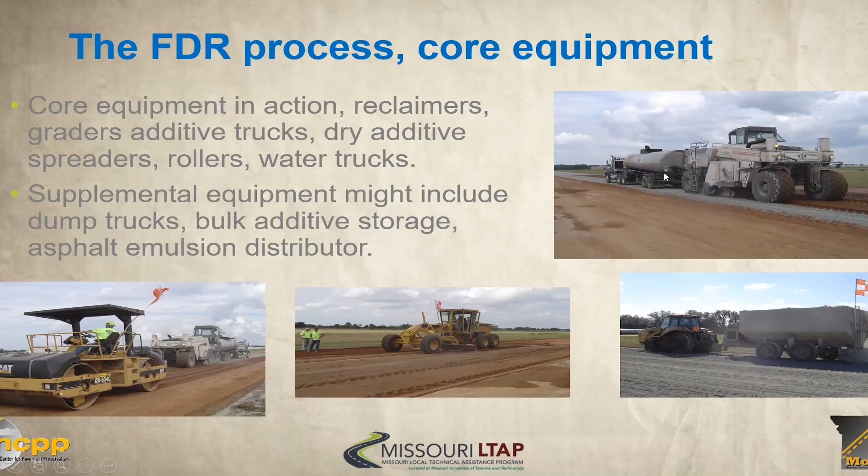So some of the benefits of full depth reclamation: again, substantial savings over traditional reconstruction. It's not preservation, but it can be used very effectively when pavements get to the end of their life cycle and we need to rehabilitate them.

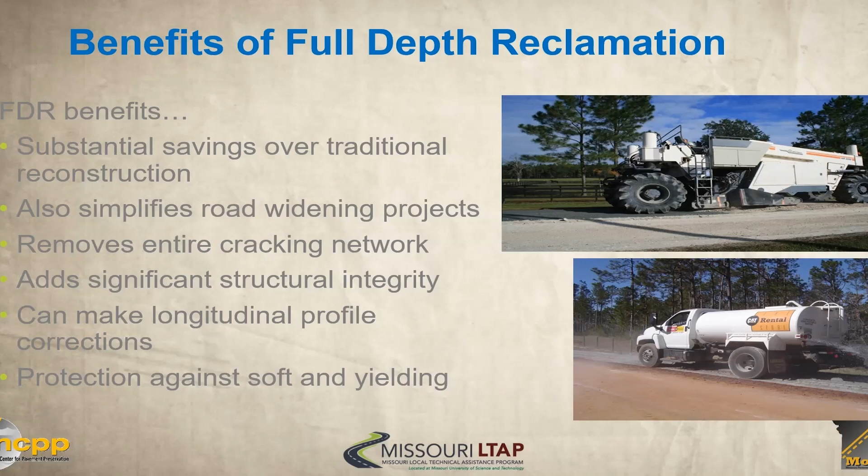Also simplifies some widening. Again, much like cold in place, you are going to remove the cracking network, and it is going to be quite effective at getting some of the structural numbers up. You can make some longitudinal profile corrections, and there's quite a bit of protection against the soft and yielding in some parts of it.

CIR or FDR? That is the question. There are some things we look at. This is the cold in place recycling, is what you would see. And then this is a standard road reclaimer. So how do we pick the difference?

Well, we're going to look at the survey, look for major adjustments to the profile. That's not going to be something cold in place is as effective with, because again, we're basically milling and then paver laying the recycled material instead of hauling it off to the asphalt plant. And obviously we've already mixed it with emulsion.

So we're going to core the road, look at the depth, look at the dominant distress. This is what we're going to do anytime we look at a pavement - look at the dominant distress and try to figure out the most cost-effective way to address the dominant distress of the pavement.

I know we talked about that for those of you who are here for modules 1 and 2. Larry talked a lot about this, and I talk about it - we want to really better understand what's going on with the pavement. In this instance with FDR and CIR, the pavement is on life support, pretty beat up. So rather than let it die, we use these recycling techniques to deal with it. Now, we also want to look for things like a high water table, because that can be a problem.

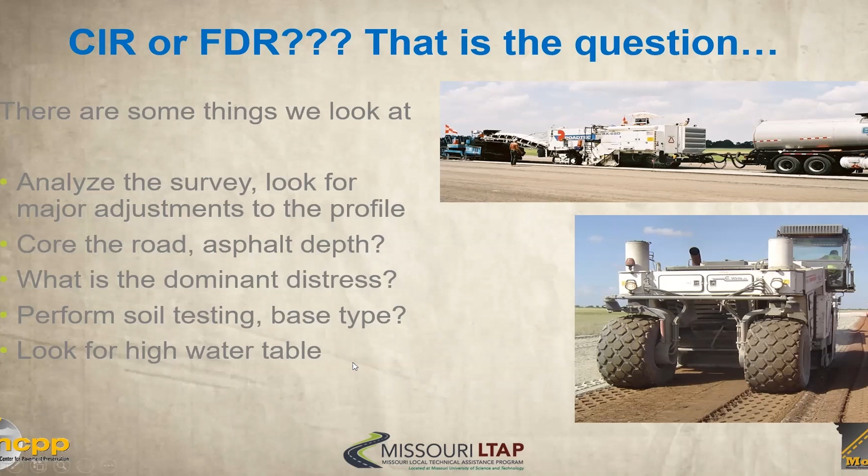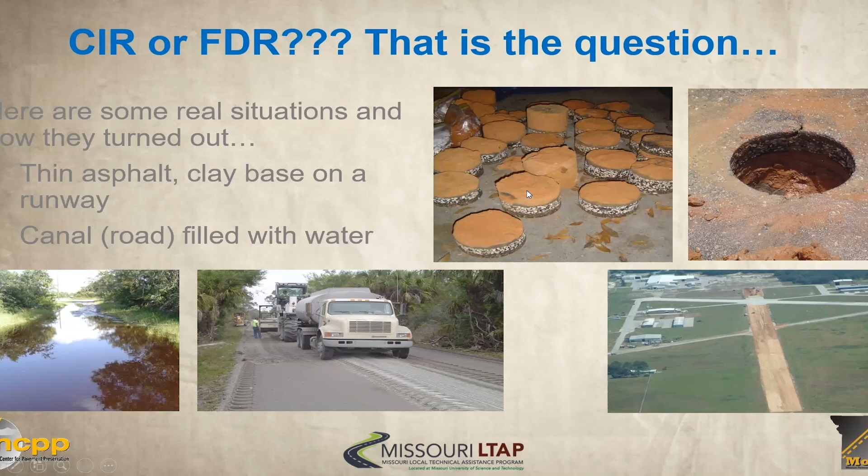This is a real road near the swamp in Florida, and it looked like a canal more than a road. But this is what the road looked like after we brought it up and then added cement. In this instance, cement was critical so that we could deal with the high water table. And this is a project you've seen where once the sand clay was discovered, it was changed from a cold in place to a full depth reclamation project.

So that's one of the key things - real situations and how they turned out. Here's the canal road, in Florida of course, but this is a primed base. Looks good. Don't have to take a boat down the roadway or down the people's neighborhood anymore.

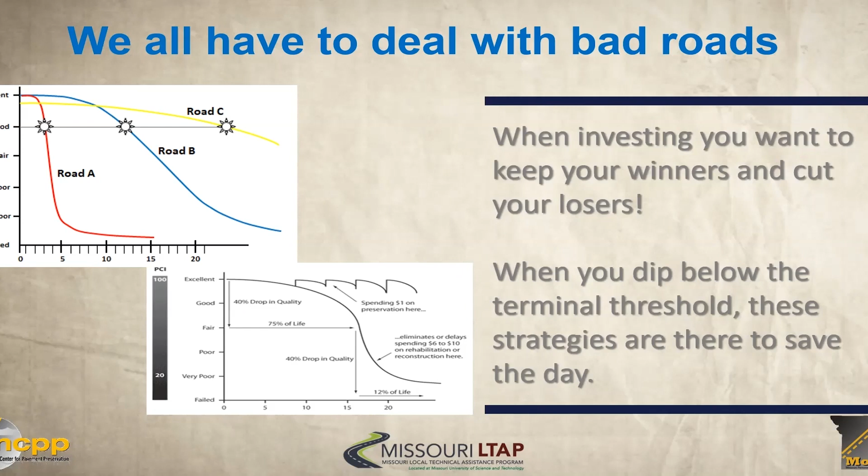And so when you dip below these terminal thresholds that we've seen before, the strategies we just covered really help you save the day, because these are going to be much more expensive. And here's a graphic from PPRA that we've used throughout: right road, right treatment, right time.

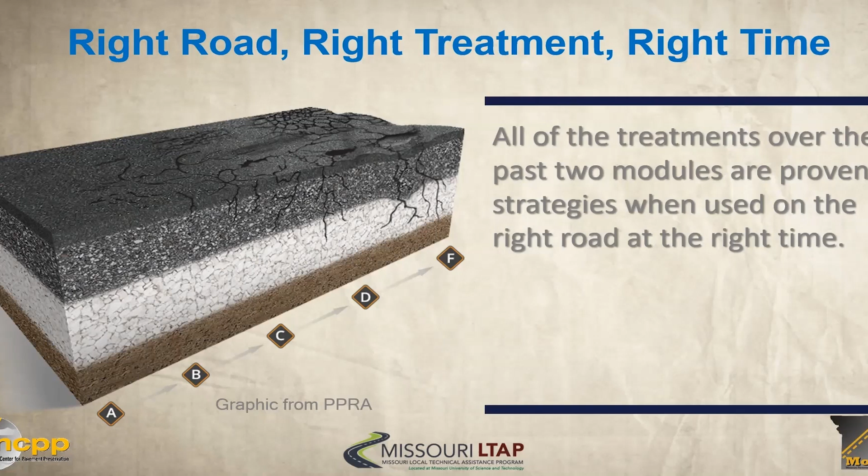And all these treatments over the past two modules are proven strategies, so don't be afraid to use these. When they're used on the right road at the right time, they're very effective.

So my last quote, this is before I turn it over to Larry, is my favorite, and that is: you don't have to be great to get started, but you have to get started to be great. So if all you're using is a hammer, everything looks like a nail. And if all you're using is asphalt, then everything looks like an asphalt candidate.

Whereas using a lot of these other strategies are going to be more effective at stretching your dollars. And with the rate of inflation being whatever they say it is - probably low, 6%, probably closer to 12-14% in construction - we have to get creative. It's incumbent on all of us to do the best job we can, picking the right road for the right treatment at the right time.